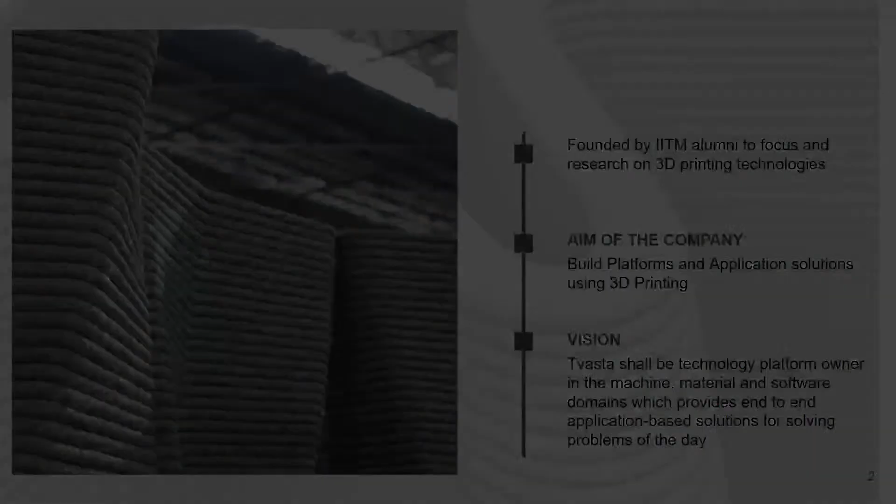Hey, the presentation got stopped. Yeah, okay, yeah, yeah. No, it's a screen mirror, bro. Like my face is only visible, the presentation is not visible.

Okay, cool. So Tvasta is an IIT Madras startup company. We started in 2016 and we were in the R&D phase for the past 6 years, and we emerged as a separate organization in the year 2020. Our ultimate aim as a company is to build platforms and affordable homes in a sustainable manner to the Indian public.

As well as to apply 3D printing technology, construction 3D printing technology, in the field of construction. Our vision is to combine all three predominant things which we manufacture - machines, material, and software - into a single thing, and we provide an end-to-end solution based on the problems we face in day-to-day life. Next slide, please.

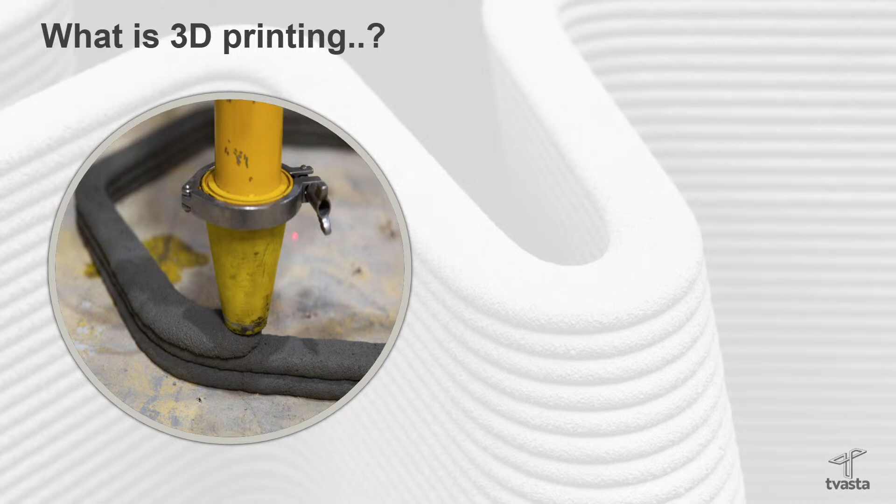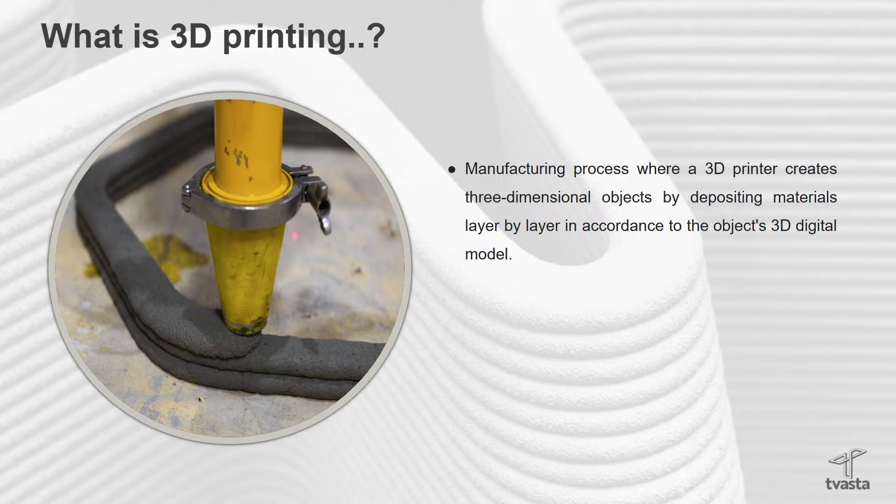As I said earlier, 3D printing is a technology, 3D printing is a manufacturing process, where the printer extrudes material in such a way that it forms layer by layer and creates a final 3D model or 3D structure, whatever we need and feed to the printer. That is what 3D printing means. Next slide, please.

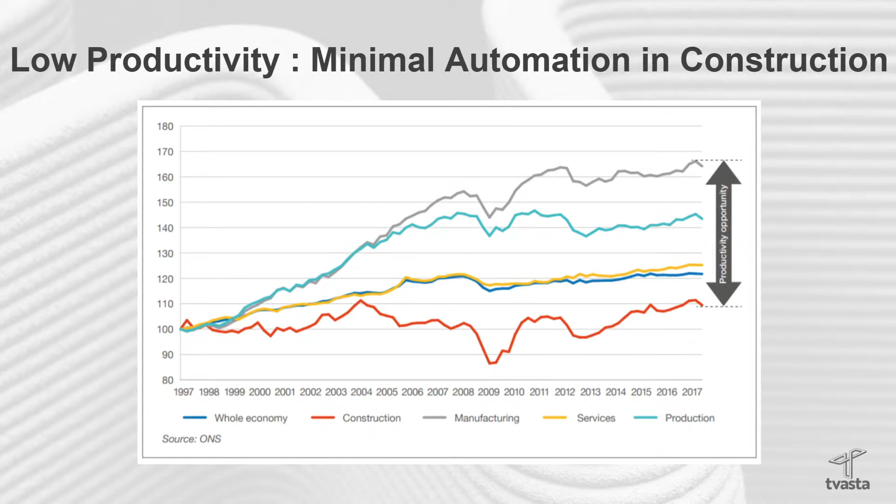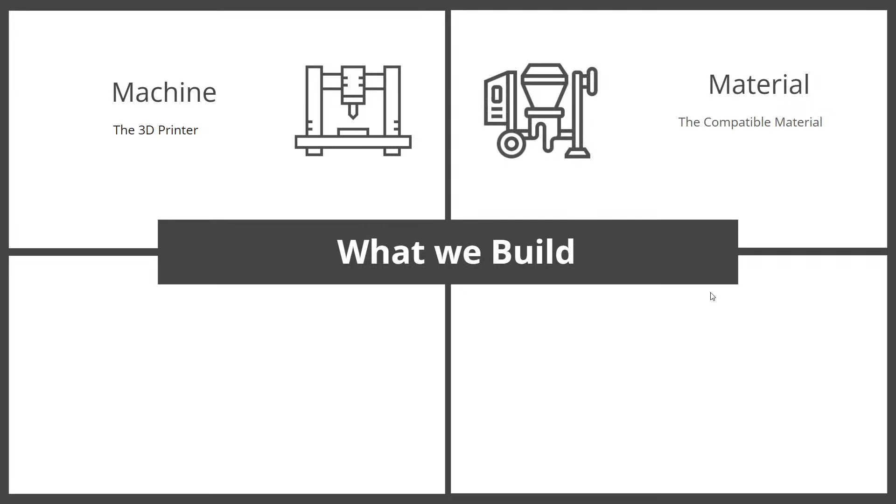So what we build in Tvasta: we build machines, material, software, and end-to-end solutions. When I talk about a machine, we have an off-site 3D printer, on-site 3D printer, static robotic arm printer, robotic arm and crawler printer, and robotic arm and rail printer. Adding to that, we have a pole printer, which is at an initial stage in our company.

Talking about the material, we have a specially engineered material which is manufactured in house. We have a separate material team in our factory who engineer the material based on the location the project is going to happen, so it is very easily adaptable based on geographical areas.

Talking about the software, we have our own custom software designed by our software engineers, with a separate software automation team in our factory. This is a completely Make in India product - all three, machine, material, and software, are Make in India products. Talking about the printing strategy, we provide end-to-end solutions starting from the basement to the...

Yeah, I got it. Thanks, I'll present. Thank you for your service, bro.

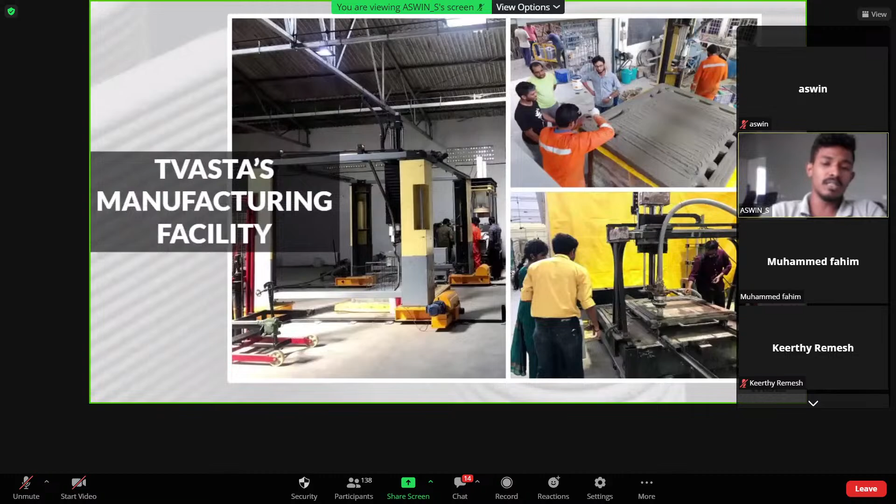So this is our basic facility which we had earlier. You can see it's R&D - the printer shown here is an R&D printer, our first version. This is our first production level printer, and using this printer we constructed India's first printed house.

Right now this printer has been dismantled, and we have a second version printer - a gantry based printer, currently based in our factory in Chennai. This is an offsite printer. We have two strategies for building structures: one is the offsite strategy, where the printer prints modules in the factory, which we ship to the site and integrate there.

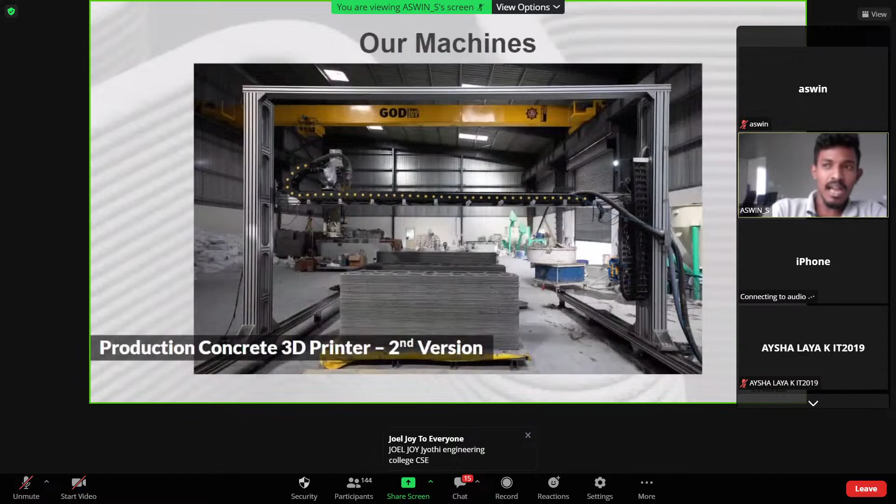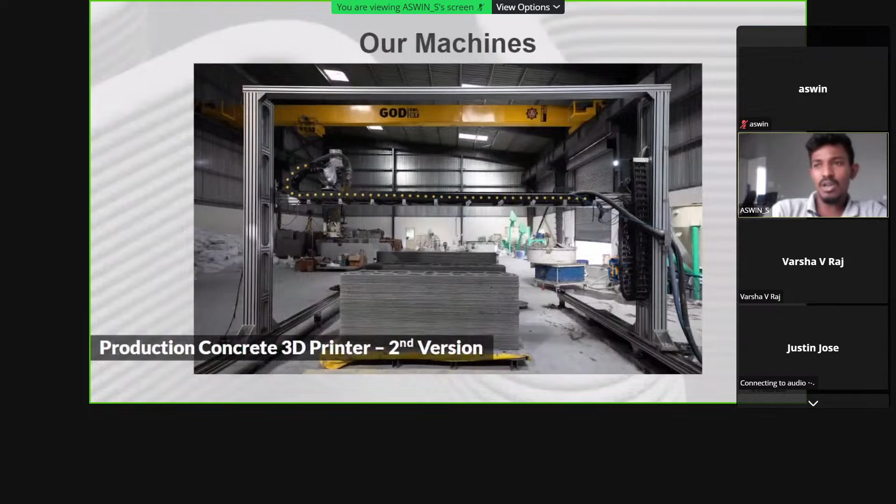Another strategy is onsite, where we bring our printer to the site and assemble the entire printer there. Our printer is capable of building or printing an entire structure in a single go - for example, you can print a G+2 structure in a single go using an on-site printer. You can see a couple of members sitting down here, to show you the comparison of size, how big scale this printer is.

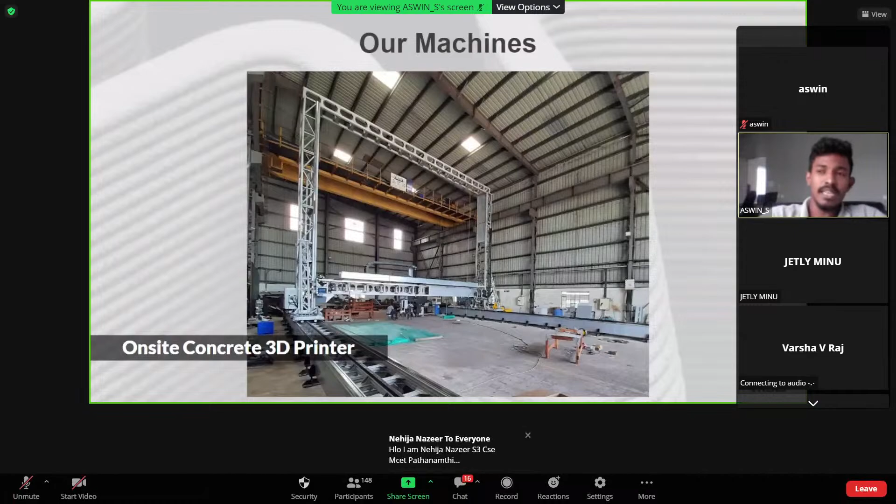So this is our robotic arm printer. This is a static robotic arm printer, where this robotic arm is mounted on the ground, and it can print. This printer is used for complex level printing, complex structures. It can print very complex print designs in an easy manner.

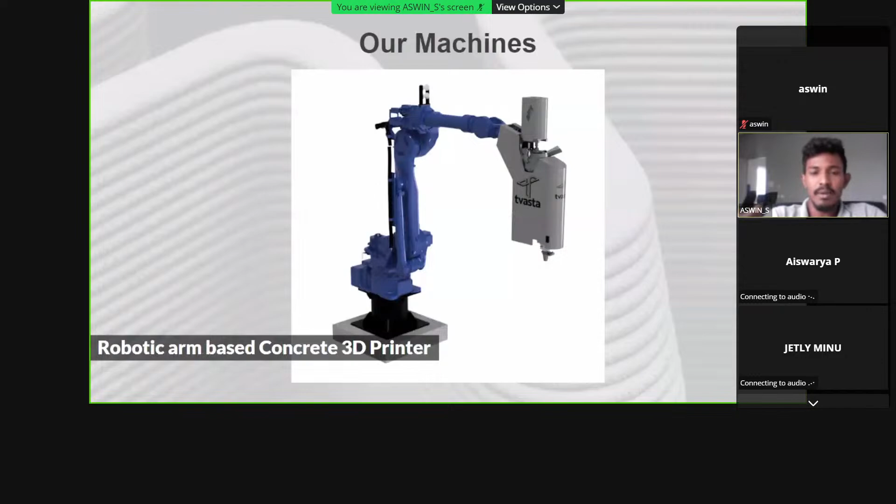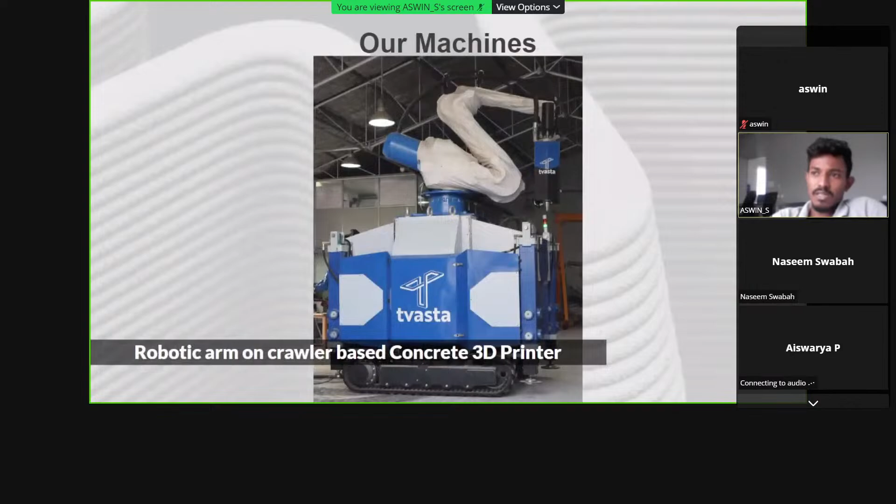So this is a robotic arm and crawler printer, where the robotic arm is mounted on a crawler, and this is a kind of mobile printer where the printer can move and print. It obviously increases the print volume, build volume, print area, so productivity and efficiency increases here.

So this is our polar printer, where right now this printer is in process, and we will soon be doing a project using this printer in Chennai, in IIT Madras.

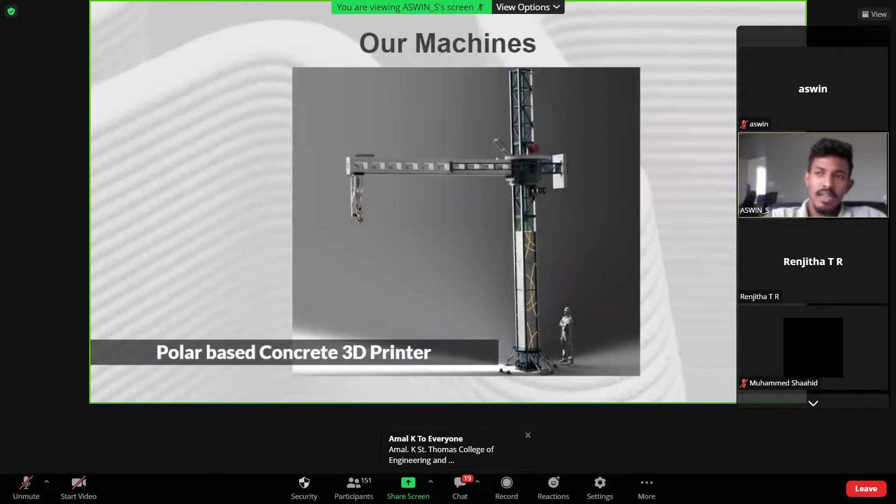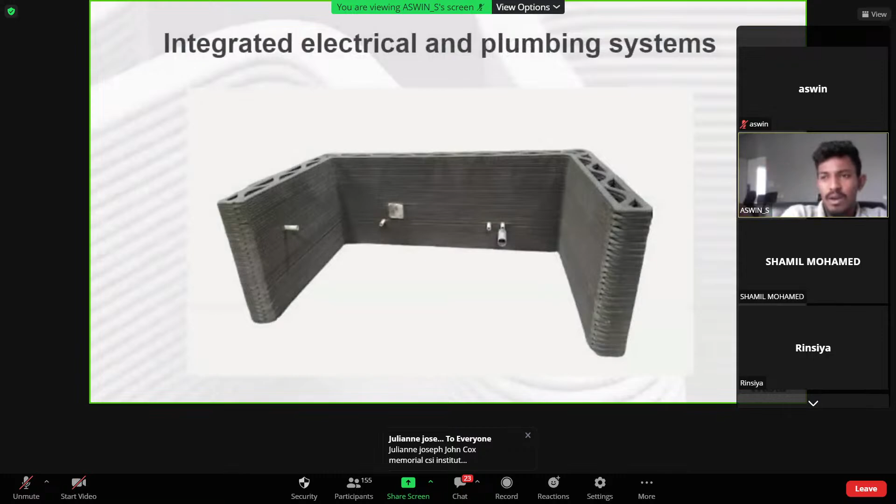During the design phase itself, we design in such a way that our printer will give space for inserting a conduit for electric boxes, switch boxes, or plumbing pipes. If the designer forgot to give a spot for the conduit to fit an electric box, we can just cut a piece after the printing, post-printing process, and insert it wherever we want. So it can be done either this way or that way.

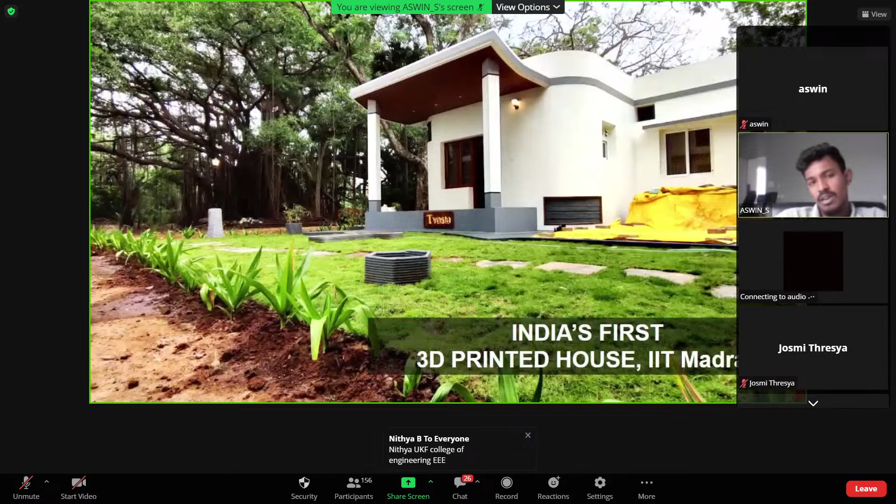This is India's first 3D printed house, which I spoke about earlier. This house was constructed in a duration of 21 days, and the entire construction of this house is posted in our YouTube channel, so you can go and check it out for further clarifications.

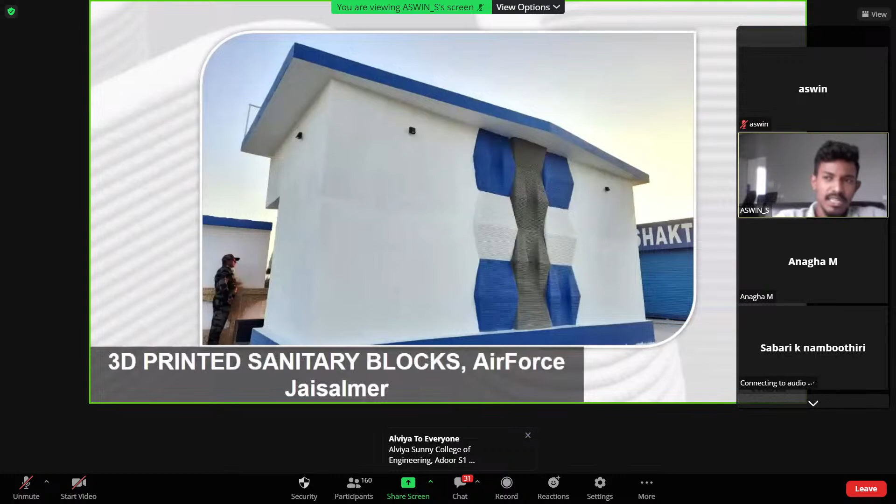So these are some sanitary blocks. We constructed a few sanitary blocks for the Indian Air Force in Jaisalmer, and this is a doffing unit.

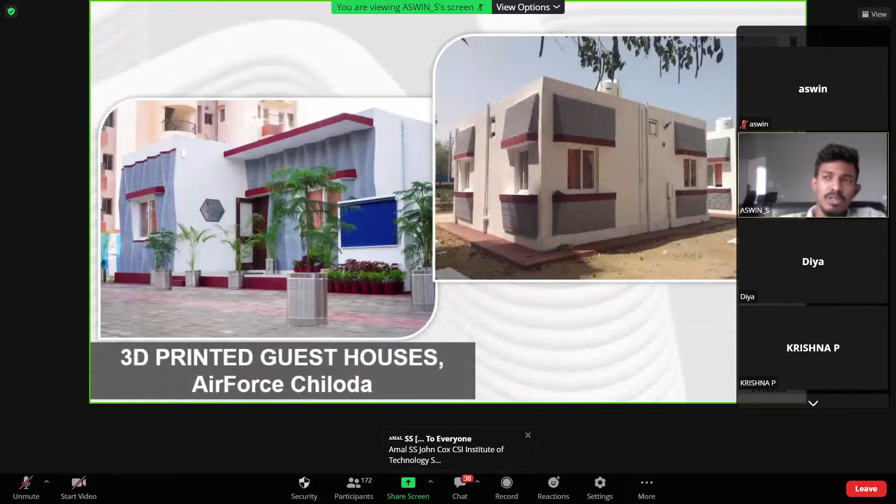This is a guest house of about 1,500 square feet in Chiloda, which is in Gujarat. We did this for the Indian Air Force, for an Airman guest house. For your information, this area comes in seismic zone 4, which is a high earthquake prone zone, so we designed it in such a way that it can withstand those kinds of earthquakes.

This is India's first independent bus shelter. We did this for Godrej Construction in Mumbai, and this shelter is currently installed at Vikhroli in Mumbai. You can see the fluidic finish, and this is a monolithic structure with no support for the roof.

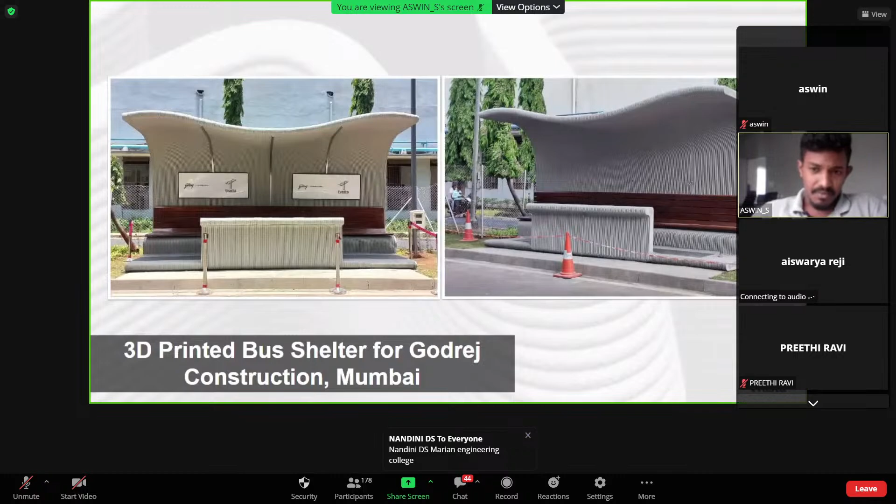So this is a recent project we inaugurated in the month of November. We did this project for India Cements, on behalf of their 75th anniversary. This was India's first independent monument. Its height is about 21 feet, and it is located in Chennai, in the India Cements headquarters. It was inaugurated by central ministers.

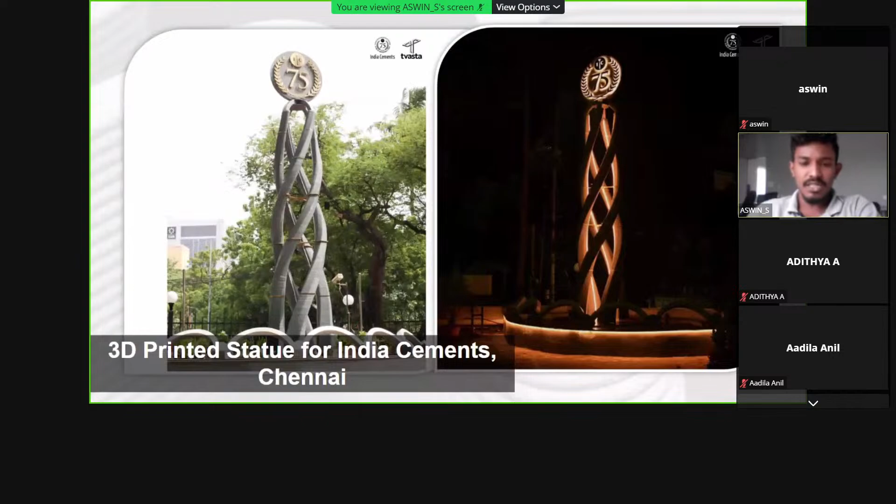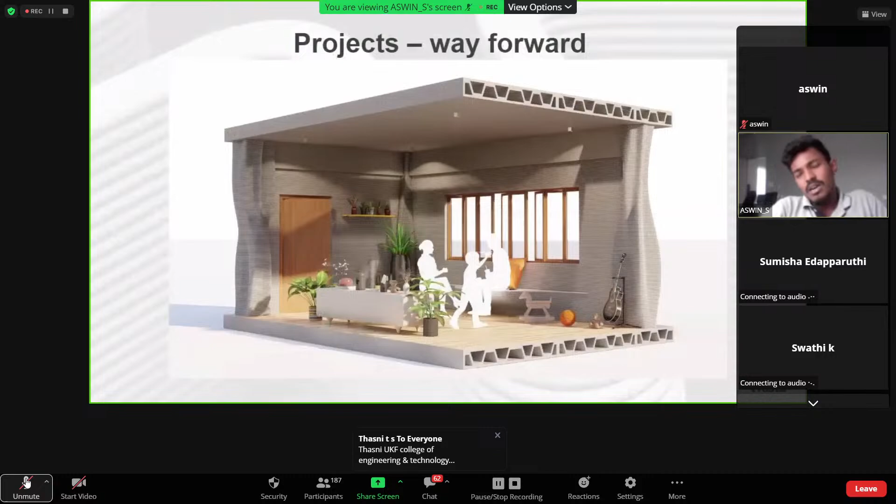So this is our way forward projects, what we will be working on in future. We have an idea to introduce a cavity-based roof and cavity-based foundation or flooring.

This acts as an insulator, both for sound as well as water seepage. We are working on that, as well as working to integrate the column with the wall module during the printing process itself. So I can see a column over here, a cavity-based roof or ceiling, and cavity-based flooring over here.

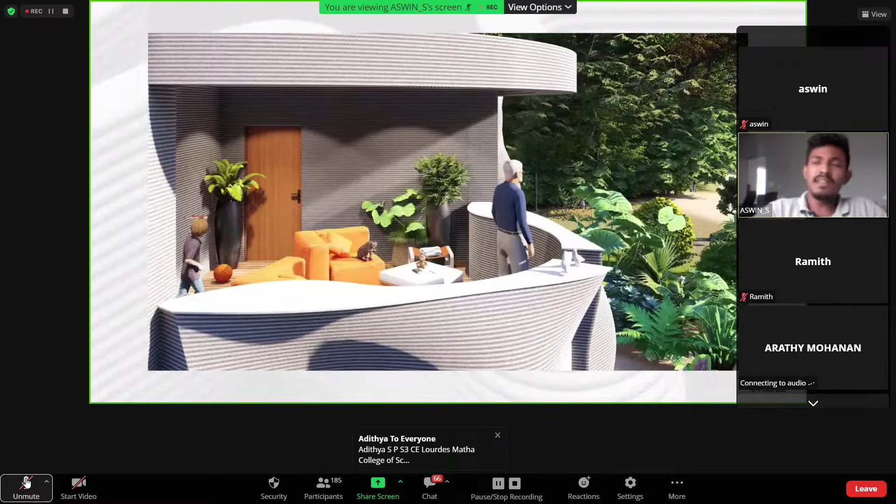So this is our fluid exterior finish, which is very easy to achieve using 3D printing technology. We are working on this as well for our exterior finish. This is one of the interesting projects we are working on right now, you can see hollow spaces over here.

We thought, why can't we change static standard rectangular or square shaped windows to circular, cuboidal, or amoebic designs of windows? We are working on that, and again here we can fill whatever material we need as an infill for filling this gap.

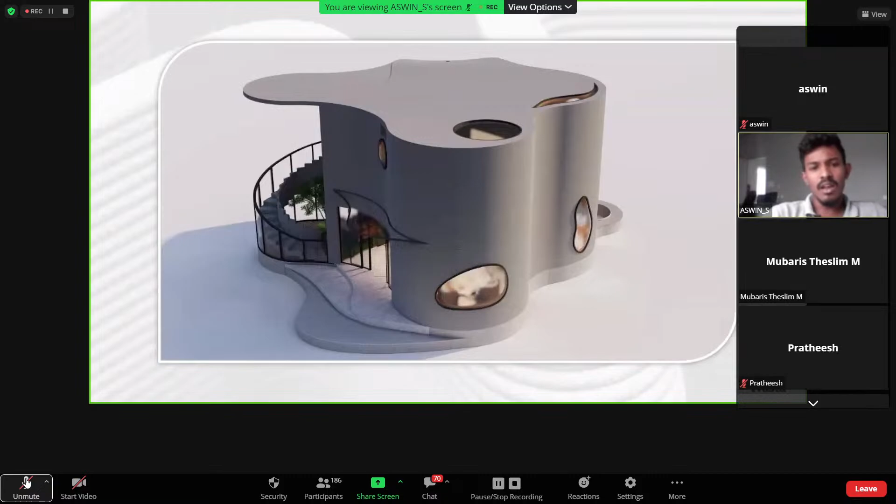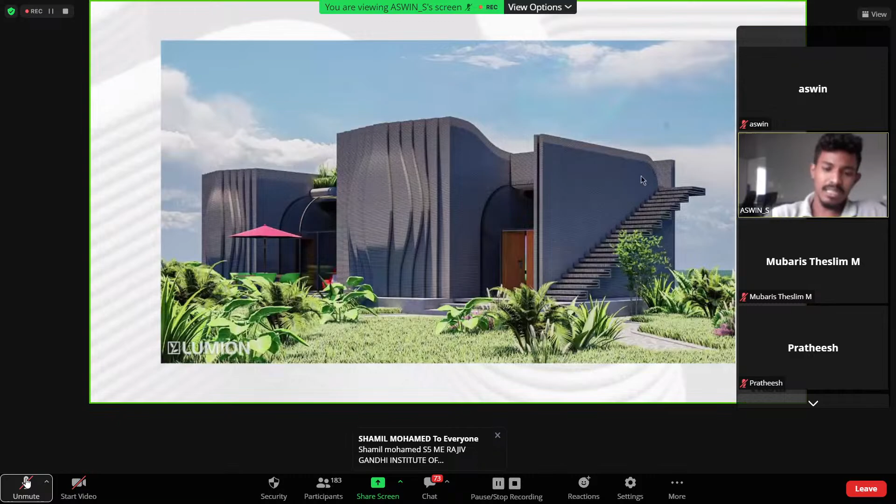This is one interesting thing we are working on, and this is another project we are working on in ECR, East Coast Road in Chennai. The idea here is to integrate the wall with the staircase during the printing process itself, so it's not printing the staircase separately and the wall separately. We will be printing both the wall and staircase simultaneously. Again, this is a G+1 structure.

This is another very interesting project. We are right now working in IIT Madras. This is a G+1 structure, which is a guest house for IIT Madras. As IIT Madras is concerned, it's in a reserve forest area where we couldn't cut any trees. Our ultimate aim is to not cut any trees inside IIT Madras, but our structure should still be built over there.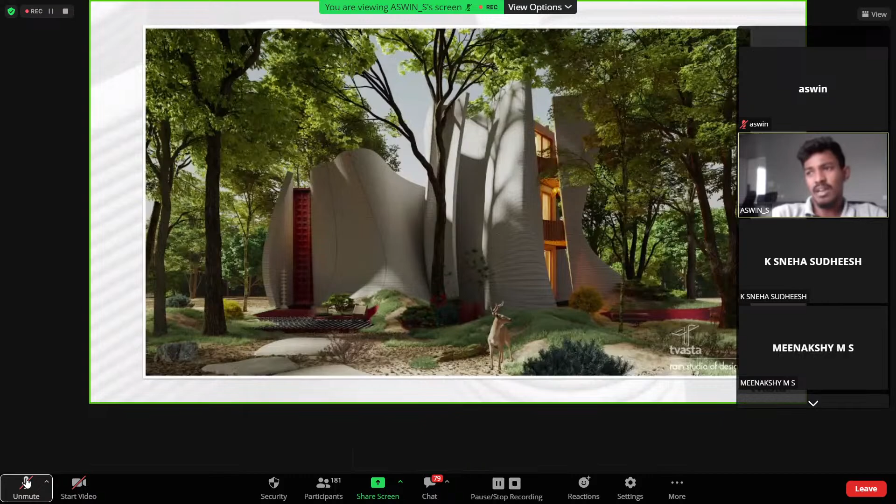What we thought is to install our mobile 3D printer or a robotic arm and crawler printer over there, so that the printer can move in and around the forest and print the entire thing. You can see in the design itself, the building is emerging from the trees or the forest itself. This is one interesting thing we are doing, and this is India's first green building, 3D printed green building.

These are our possibilities of 3D printing technology and on-site printing. We can see possible villas on the right side, and a possible G+7 structure over here. This can be printed using our 3D printers, but right now we are working on framing some policies with governments so that we can print G+2 and G+3 structures.

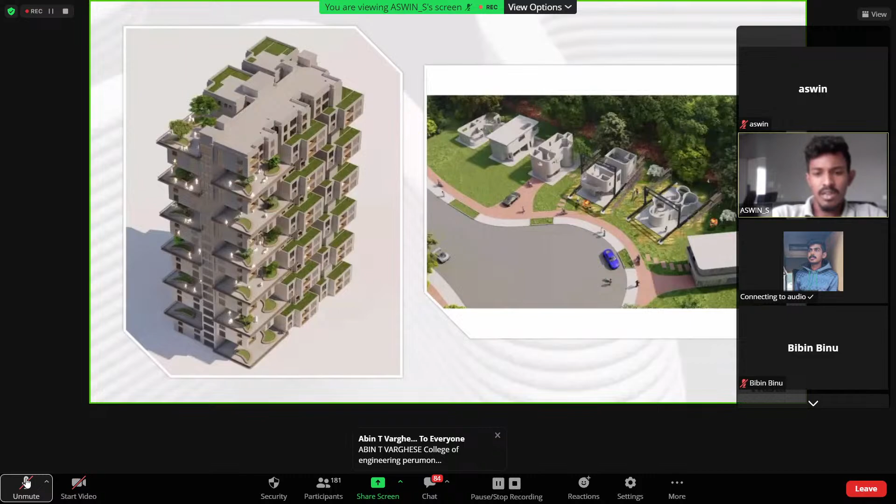These are some architectural and structural elements which can be very easily printed using custom 3D printers. These are some furnitures and planters.

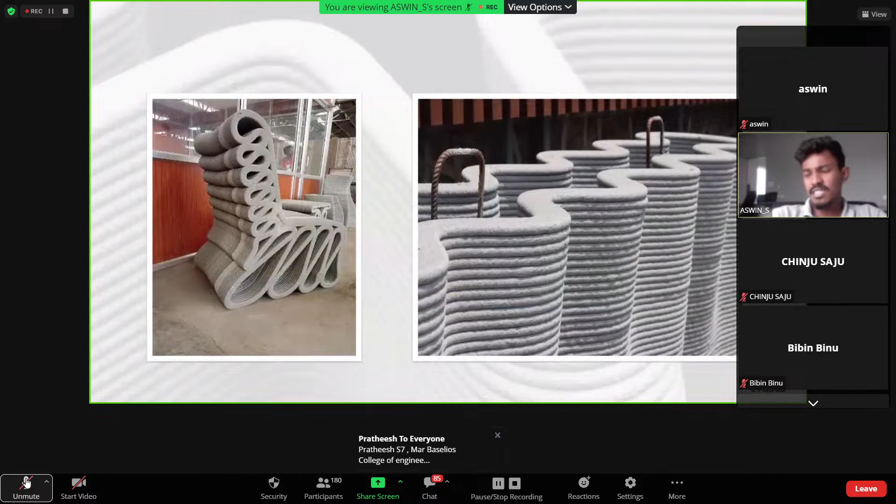So this is our planters, and you can see the exterior designs - planters, seaters, and these are structures which don't need any support or column kind of thing. So you can see a clock based seater over here, and you can see a column over here.

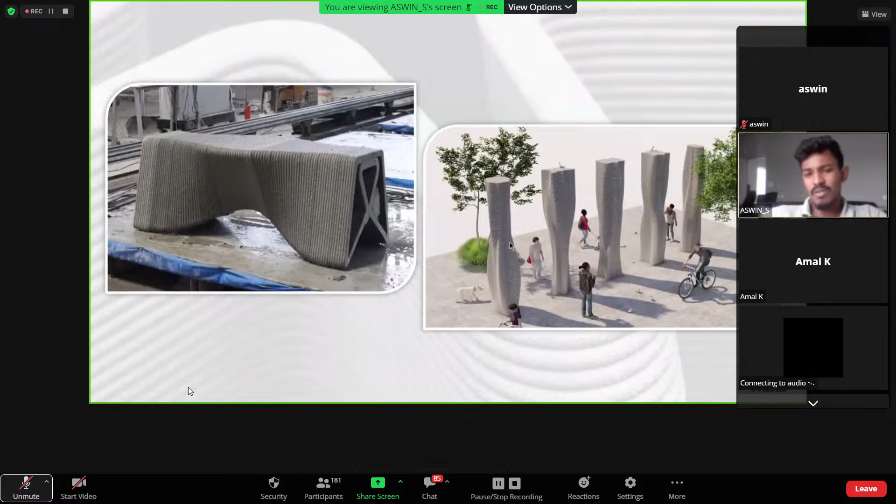So you can see two unique possibilities of finishes, which is a dome. On your left side it's a dome kind of structure, on your right side it's a column kind of structure, and both have two unique finishes in the exterior.

We have certification memberships with ISO and IGBC, and we are also a member of CII. These are our awards and collaborations - we have collaborated with Ministry of Housing and Urban Affairs, CBRE, IIT Madras, IIM Ahmedabad, IIT Allahabad, IIT Roorkee, IIT Kanpur, India Cement, State Government, Godrej, and so on. We have collaborated with most of the institutes in India, and we have a lot of awards, but we didn't update it in the slides.

These are recognitions and presses, like for our IIT Madras houses, where Narendra Modi ji mentioned it in his Mann Ki Baat program. This house was inaugurated by Nirmala Sitharaman ji. Since this house was constructed during the COVID season, we couldn't inaugurate it in the physical manner, so she inaugurated it virtually. A few Indian government dignitaries visited our house recently.

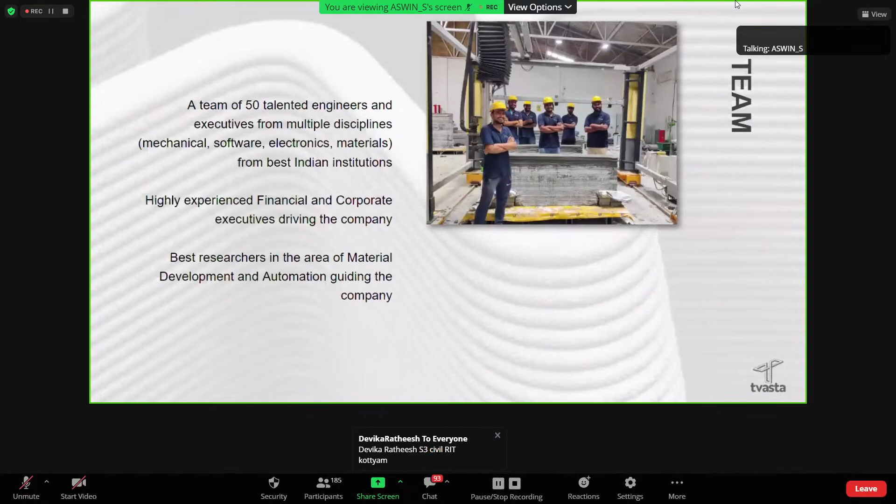So this is our core team who built India's first 3D printed house and other structures. We have 50 talented engineers in our team.

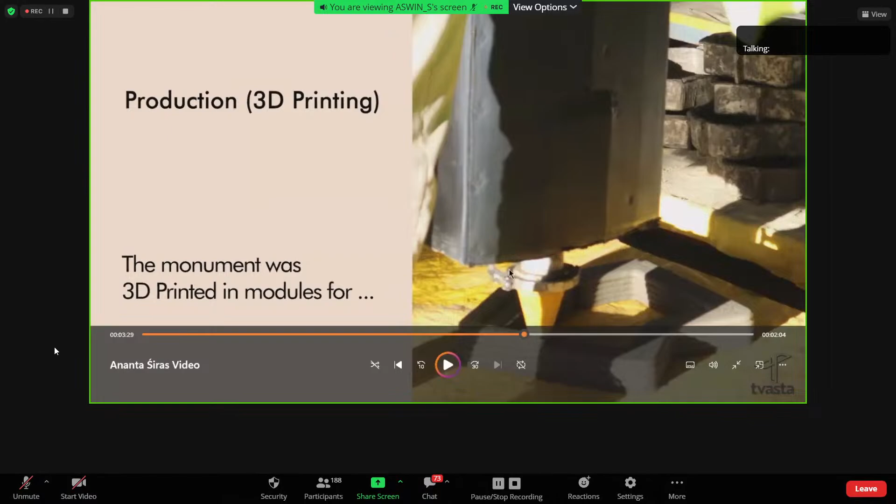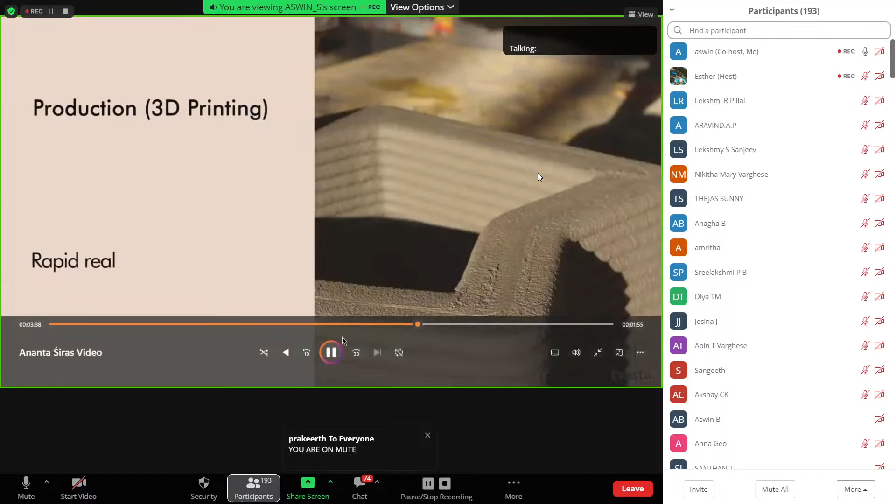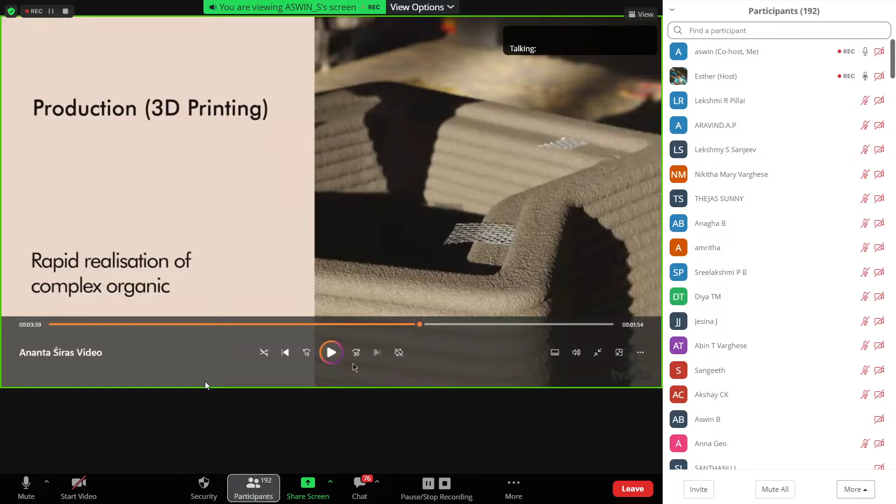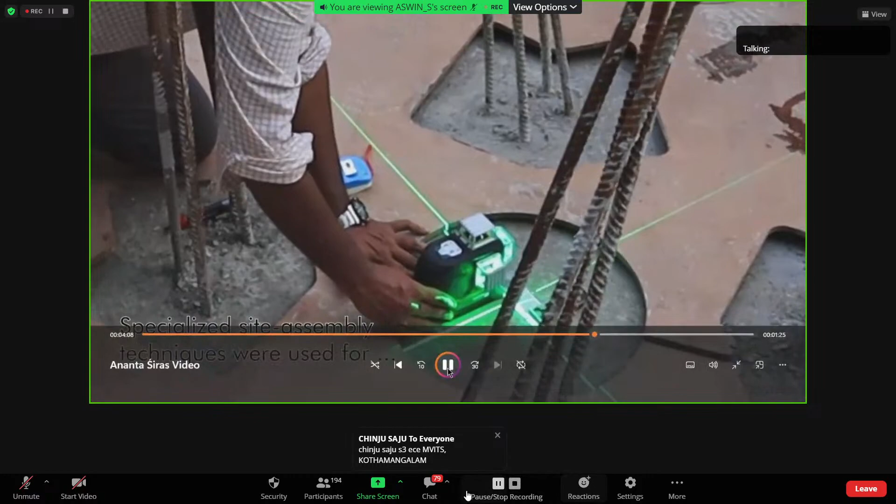So you're on mute. Sir, are you talking? You are muted actually. Aswin sir, can you hear me? Sir, you're on mute actually.

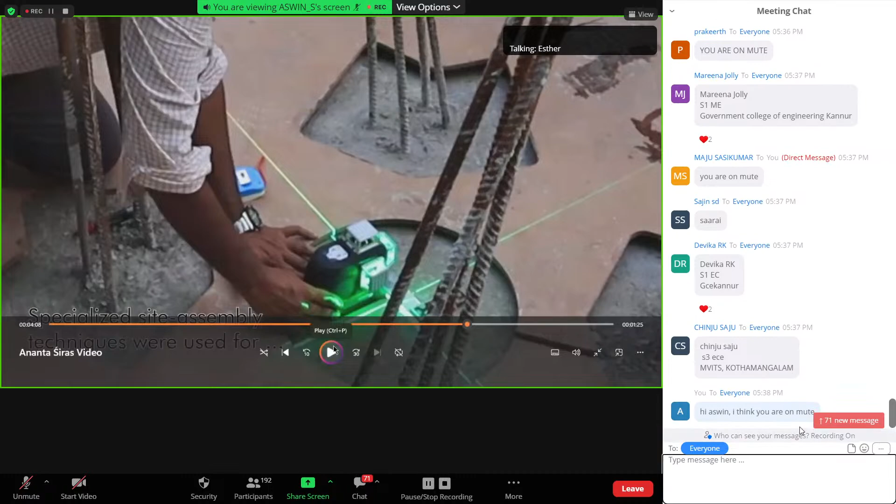Okay, so you didn't hear what I told during the video. We couldn't hear it. Okay, so I was explaining about what we do, like prototyping will be happening. Post prototyping, the simulation things will be happening for identifying the strengthening process, and post simulation process everything.

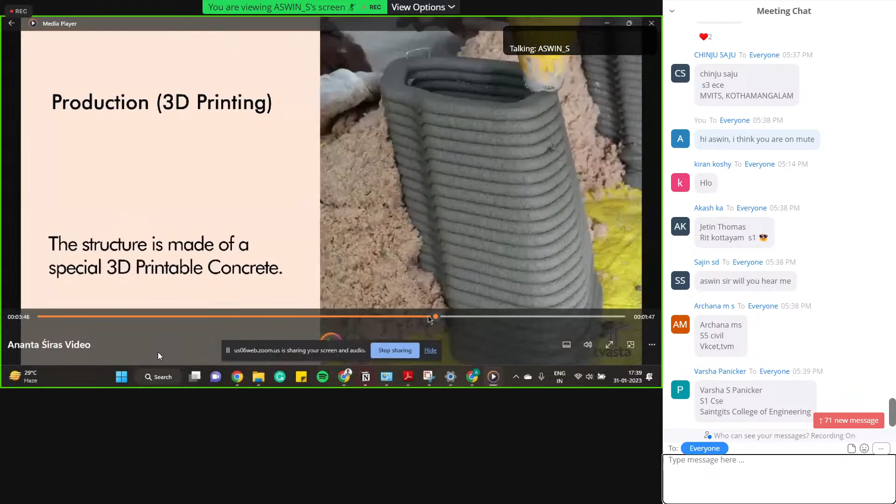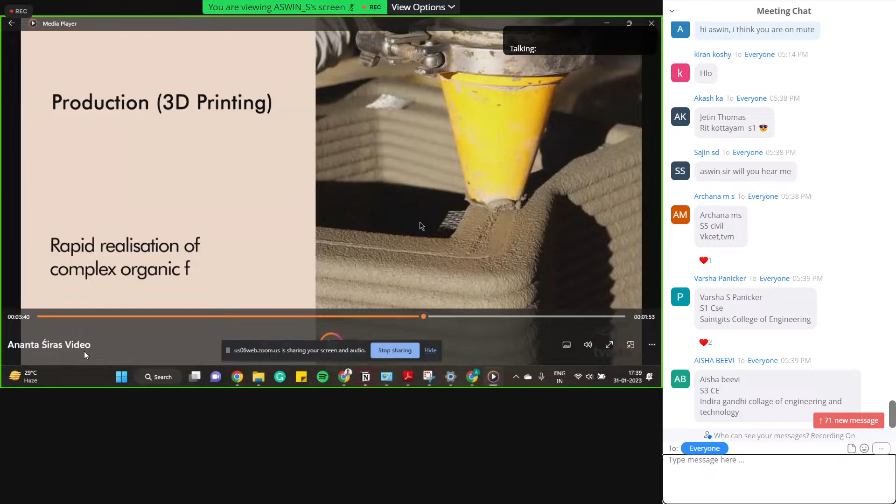After the printing process, there's a steel mesh or iron mesh which is placed during the printing process. You can see the steel mesh is placed over here manually. This is horizontal reinforcement placed during the printing process, and post printing process will give a vertical reinforcement, which I'll show in this video. This is to increase the strength of the structure.

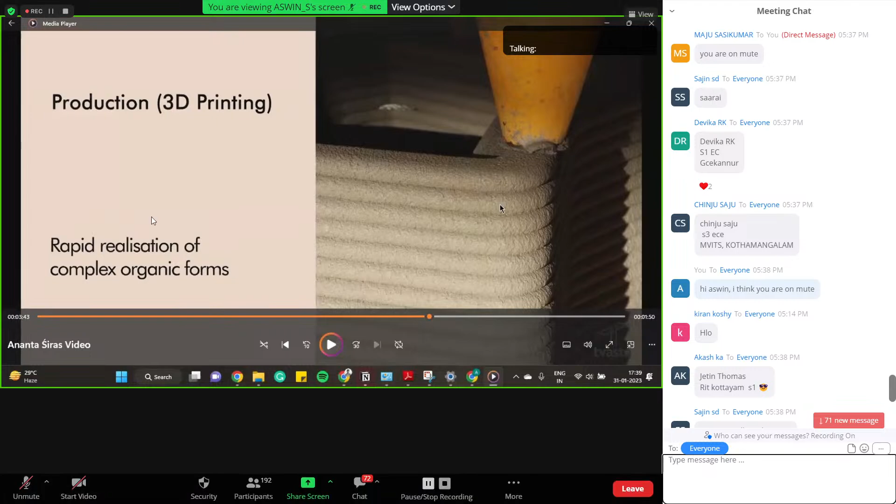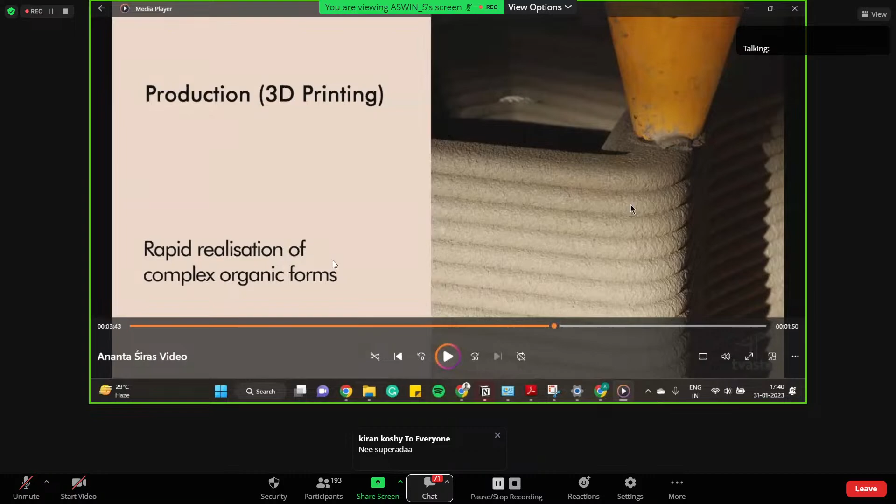You can see the material, this is a nozzle kind of setup. The material solidifies and hardens the moment it gets extruded from the extruder. The moment you extrude from the nozzle, the material holds a defined shape so it does not collapse based on the load bearing of another layer adding on. We specially engineer this material to solidify the moment it's extruded, so the beneath layer will not collapse, and it can bear the load of the upcoming layers printed on it.

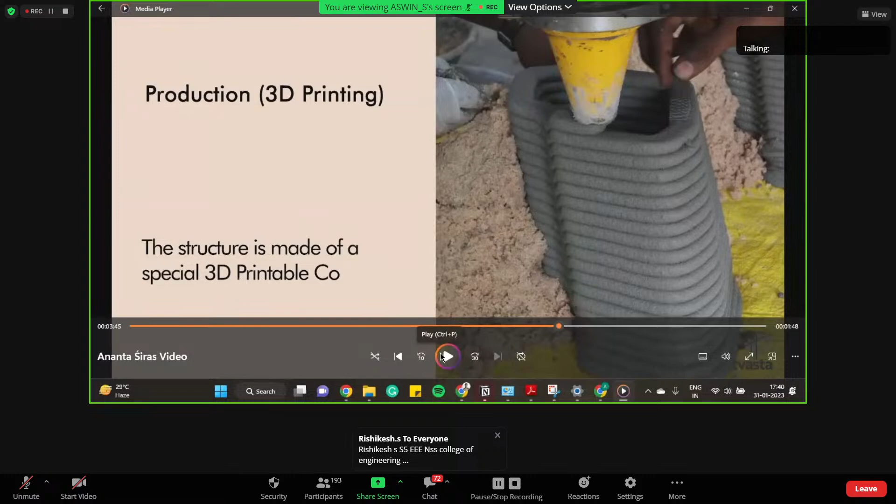We are adding this sand for support purposes, since this is a twisted and slanted, steep kind of design. So we are adding this sand for some supporting purpose.

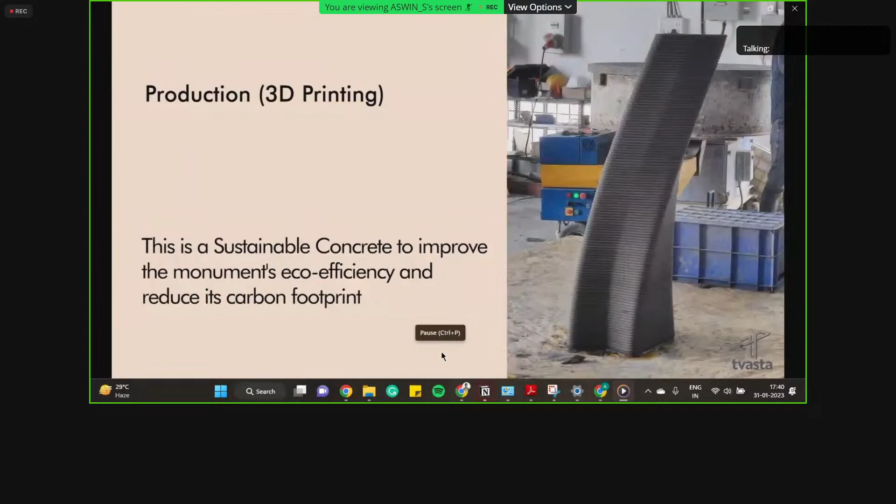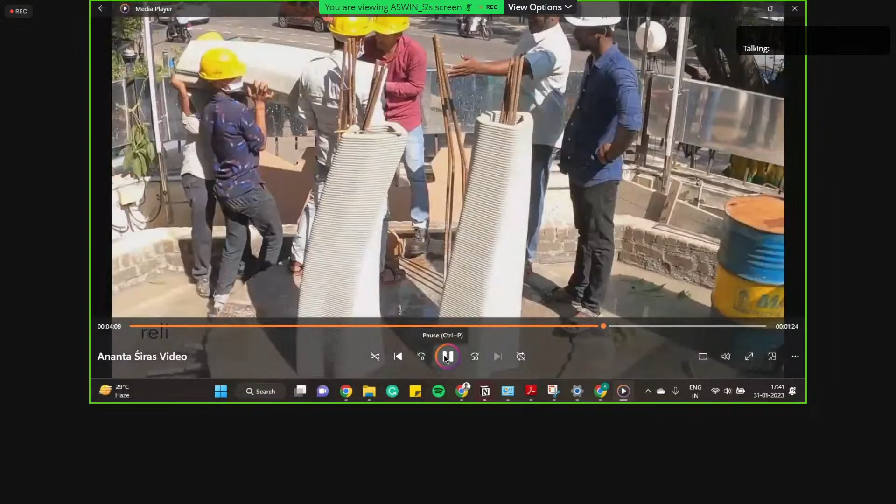We printed the structure using our robotic arm and static concrete based printer. This shows how the assembly is done and how the project is executed on site. Here we are checking the level of where we are going to place it. These are the vertical reinforcements I spoke about earlier. Our module will be inserted into these steel iron rods and grouted using a grout material. You can see the module is inserted over the iron rod - this is an off-site strategy.

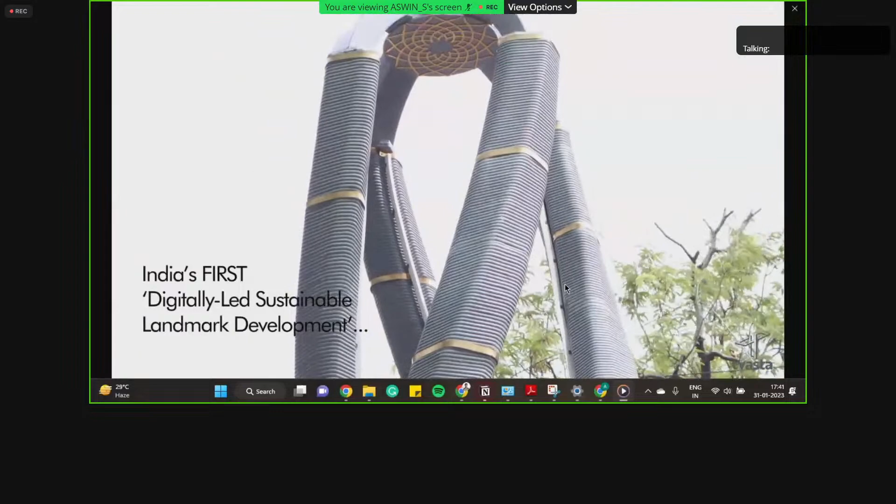So this is about this monument. This is how we execute projects. We will be grouting materials inside throughout the structure so that it gets stable, and it increases the strength of the structure whatever we build.

This is how we execute projects, and you might have some questions based on the video you've seen recently. You can go ahead with the questions. Any other doubts regarding this technology, or any other doubts regarding this video which was just seen?

For this structure, ideally speaking, we took around 2.5 weeks to 3 weeks, including the foundations, curing period, everything.